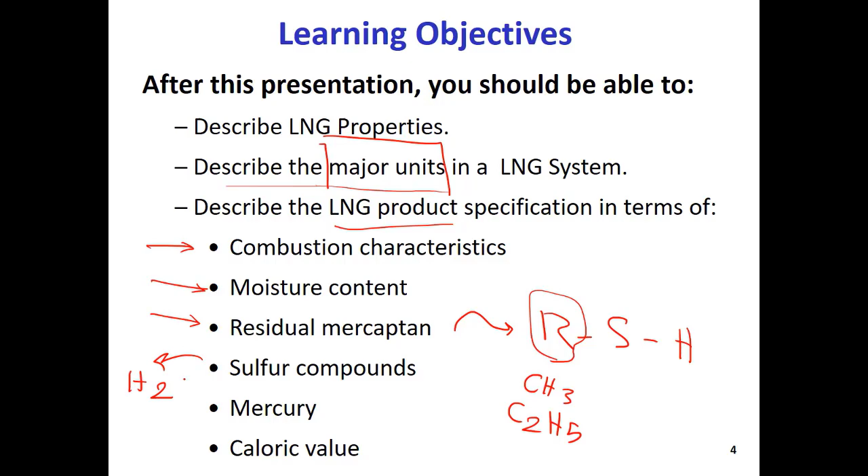S is sulfur, H is hydrogen, R is any molecule that has carbon and hydrogen, like CH3, or C2H5—any hydrocarbon that contains carbon. Other sulfur compounds can include H2S, for example, mercury, and caloric value.

LNG—what is LNG and its properties? LNG is liquefied natural gas, the natural gas in liquid form. It's a mixture of hydrocarbons, mainly methane. The main component of LNG or natural gas is methane, CH4.

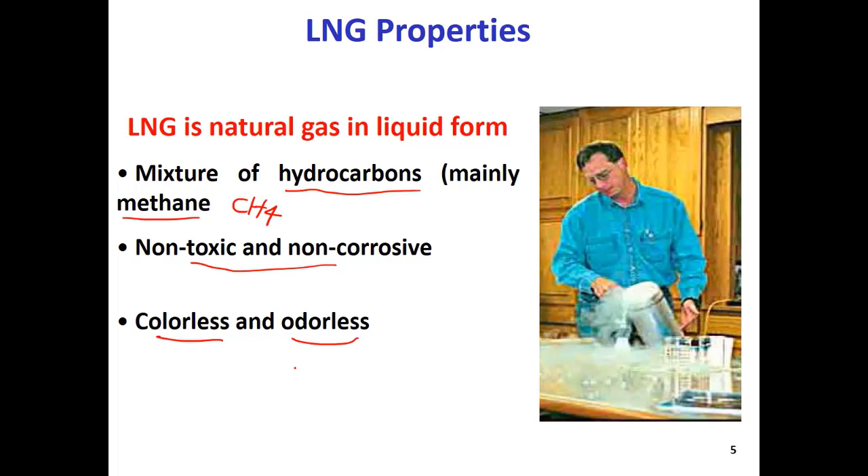It's a non-toxic and non-corrosive material, colorless and odorless—so it doesn't have any color and it doesn't have any smell. Once it is spread on land or water, it doesn't leave any residue; it will vaporize into the atmosphere.

Another property: it has a boiling point, as I remember, about minus 162 degrees Celsius. Below this temperature, it will be in liquid form. This is just one additional piece of information for you.

Above minus 107 degrees, it is lighter than air. So at atmospheric temperature, which is about 23 degrees C on average, the ambient temperature, it will be much lighter than air. Lighter means less density than air, so it means it can go up in the air very rapidly.

So it's very flammable—not explosive, but flammable. It can catch fire at very small volumes. Let's say if you have a container where between 5 to 15% of the volume is LNG, it can easily catch fire. It's not explosive unless it's ignited in a closed space—then it can be explosive. But it's not like TNT, which can explode even in solid form.

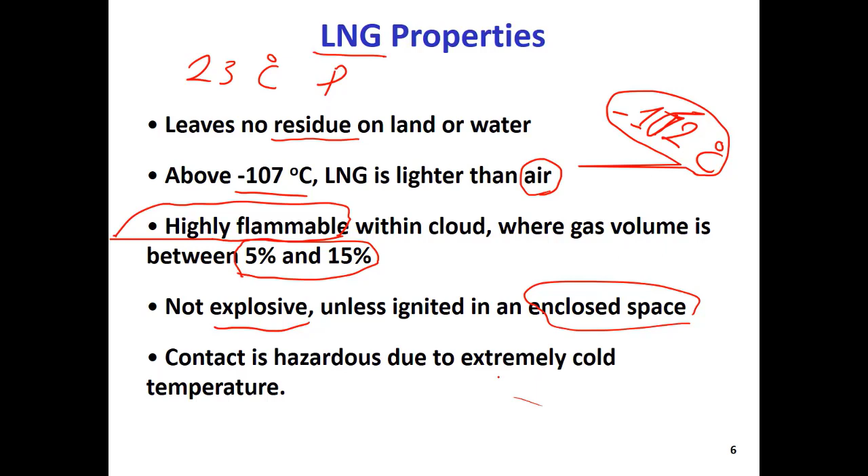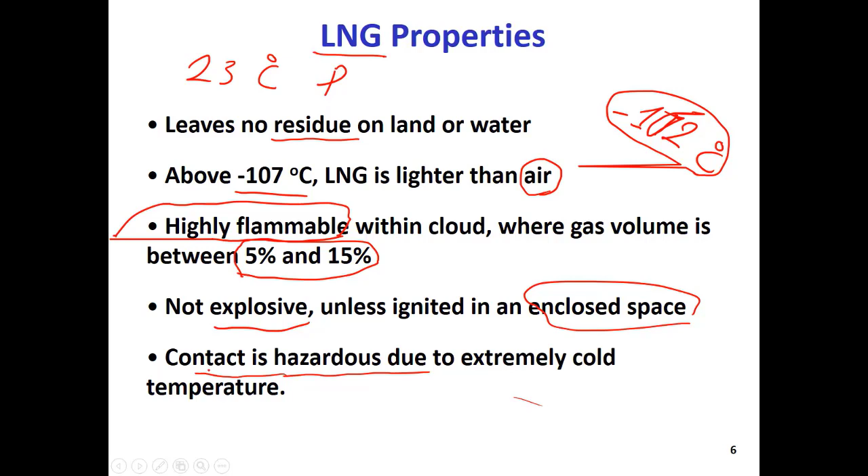LNG is maintained at a very low temperature. As I said, the boiling temperature is minus 162. It's kept at very low temperature, and that's why it's very dangerous if you touch it. If you have an LNG container, since it's at a very low temperature, it's very dangerous to contact with. So these two slides are the properties of LNG.

Now, why do we have to liquefy natural gas? Why do we have to create LNG? The first and main important reason is the lower volume. When you have, let's say, 1 kilogram of natural gas in the gas form, and you convert it to the liquid form, you decrease the volume by 600 times. So 1 kilogram of natural gas in the gas form needs a volume 600 times more than if the gas is in liquid form.

So that means if we liquefy it, we need much less volume, so we can transport and store it more easily. And then, let's say if we have a gas pipeline that is supplying gas for us, sometimes during winter in cold countries the heating demand is higher, so we need to add more gas to the pipeline. If we have LNG storage somewhere, we can merge it with this gas pipeline and add more gas to satisfy the demand.

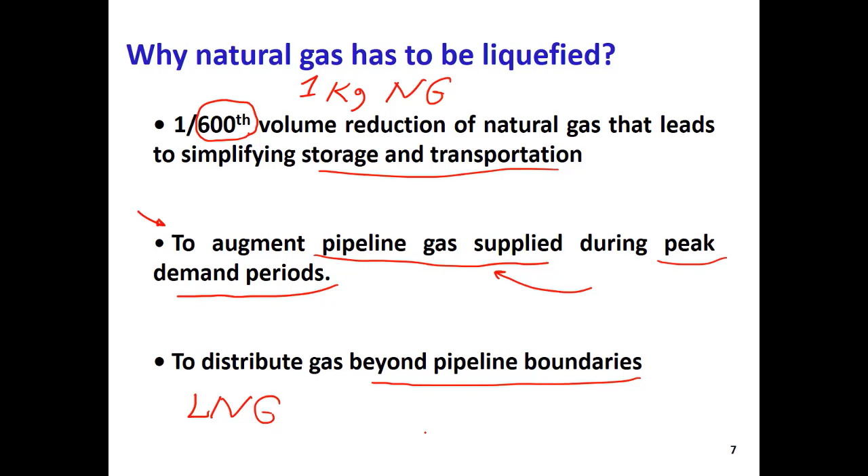Qatar is a country in the Middle East that has a lot of natural gas. We cannot export all this natural gas by pipeline to many other countries. Maybe it's possible to export to neighboring countries, but if you are going to export natural gas from Qatar to Europe or to Asian countries, we cannot do it with pipeline. We need too much infrastructure; it's not possible. This is impossible to do. So by having LNG, converting natural gas to liquid phase, we can send the gas anywhere we want, beyond the pipeline boundaries.

We have different petroleum products. Kerosene is a very heavy oil. Gasoline is light oil, light crude oil. Naphtha is even lighter than gasoline. There's also jet fuel and some other chemicals. We have LPG, liquid petroleum gas. So crude oil has different fractions, some of which can be liquefied easily, like those with between 3 to 4 carbons. We also have NGL, natural gas liquids, and LNG.

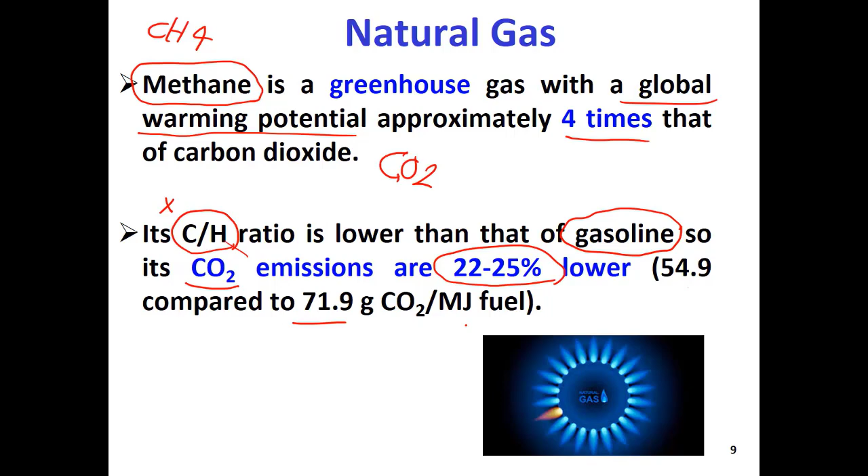That's why natural gas as a fuel is cleaner than gasoline, because when you burn it, it doesn't produce a lot of CO2 compared with gasoline. It's about 54 grams of CO2 per each megajoule of natural gas that is burned.

Liquid hydrocarbon like petroleum or gasoline is the gas we use in our car. Before I explain this, combustion of methane is different from liquid hydrocarbon combustion. The reason is that in liquid hydrocarbon like gasoline or petroleum, we have different carbon-hydrogen bonds; we can have double carbon bonds, different carbon-hydrogen or carbon-carbon bonds in gasoline.

But in natural gas, the majority of molecules is methane, which has only single carbon-hydrogen bonds, like 4 of them. This is different from liquid hydrocarbon, which can have different types of bonds. Even in liquid hydrocarbon we have double bonds and single bonds, but the majority is single bonds. In natural gas, we don't even have that single carbon bond situation - since there is no carbon-carbon bond involved.

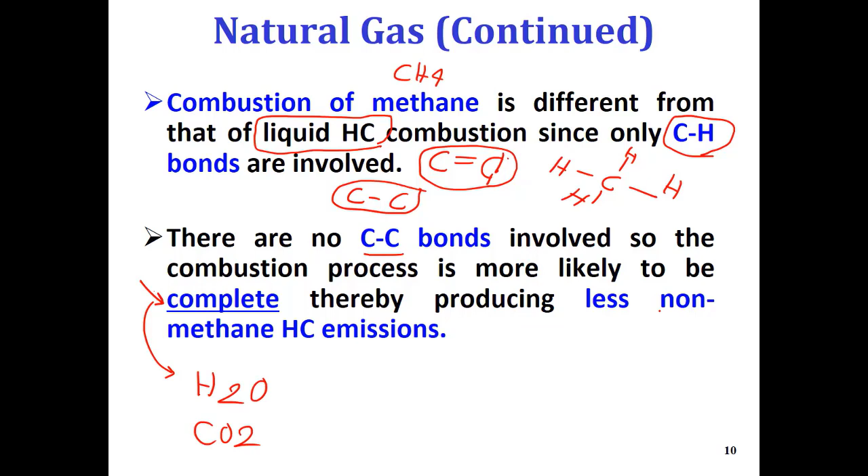Since we don't have carbon-carbon bonds, the combustion of natural gas is more likely to be complete. So we will have really complete combustion, and the combustion product is mainly water and carbon dioxide. It doesn't produce any non-methane hydrocarbon after combustion.

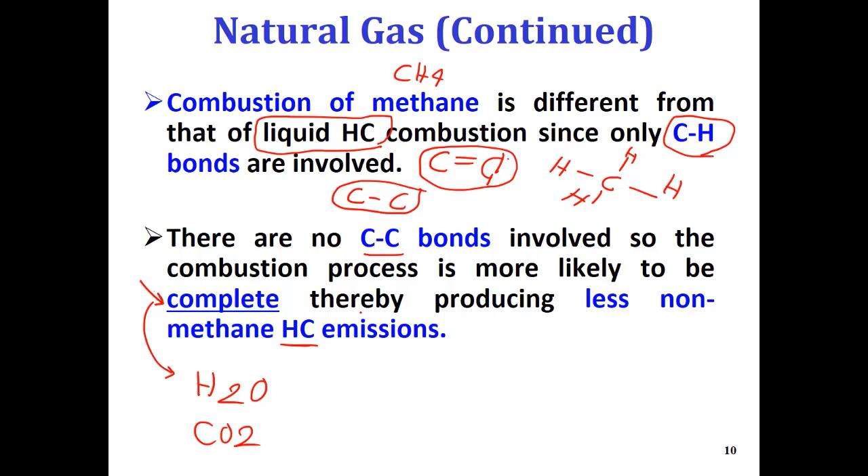Again, here we study some of the advantages - this is also a continuing advantage of natural gas. Particulate emissions are very low compared to diesel fuel. So when we burn natural gas, we don't produce any kind of smoke or coke formation. There is no smoke, so it's a very clean fuel.

The adiabatic flame temperature for natural gas is about 2240 Kelvin, which is less than that for gasoline flame, which is 2310 Kelvin. So the flame temperature is lower - this is another advantage. The equipment that burns this gas needs less thermal resistance, so it will be less costly for us.

If we can have a flame at lower temperature, this is advantageous - it's good for many applications in terms of safety and hazard considerations. The reason is that when natural gas is burned, it produces water, and this water content will keep the flame temperature lower, and it also gives us lower NOx molecules.

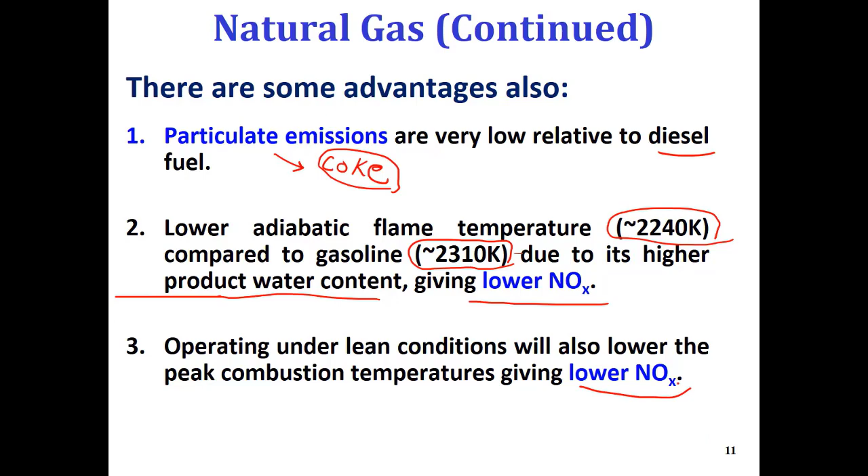We already talked about why we have to liquefy gas to produce LNG, but the natural gas coming out of the reservoir is not only methane. It has a lot of unwanted, undesired components that we have to separate. Depending on which area or country we are sending this LNG to, that country has specific requirements, so we have to treat our natural gas and convert it to LNG before shipping it to the receiving country.

So why do we need to treat it first? To obtain the specification requested, and to protect the equipment - many equipments are sensitive to corrosive components like steel and metals, so we have to protect them. Also for environmental reasons - these days environmental regulations are very strict, we have to follow them and meet them, otherwise we cannot be in the market.

Whoever is receiving your LNG will process it and send it to equipment - different equipment used for different reasons. The type of equipment or process using the LNG really depends on the LNG pre-treatment, which type of treatment has been done before. They have to check which type of treatment is needed, and the cost will vary. If you have dirty, sour, or sweet natural gas, they have different prices, so you have to see how much money you need to clean and treat that gas, then decide which option is more affordable.

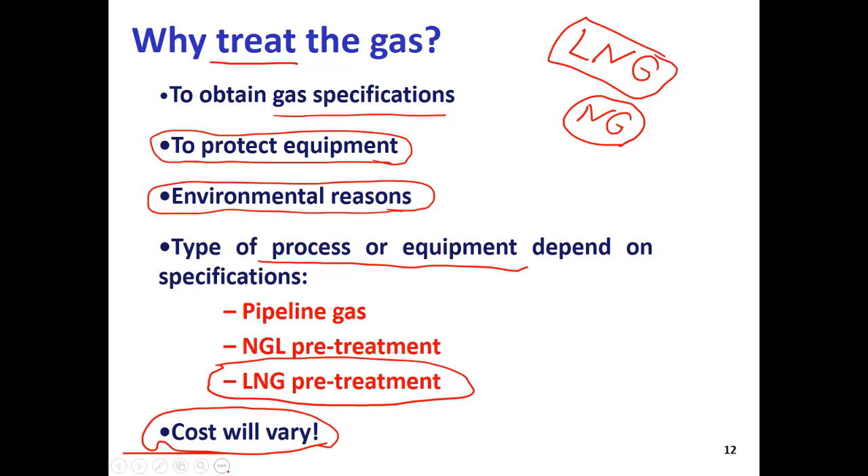So this is an overall diagram for LNG processing. Most of our gas fields are offshore, in the sea. We have gas stations that extract the gas from the sea, and we send it onshore, to the land. In the land, we have a sequence of equipment. First of all, we have equipment like a slug catcher.

That's because this natural gas coming from underground comes with sludge, mud, and water. So we have to separate the water, sludge, and some other impurities that can be easily separated based on their gravity or density. We can also have some condensate here, some heavy hydrocarbon molecules.

Then we have almost a raw natural gas free of solid or sludge. We will send it to several purification and treatment processes, which we'll talk about a little later. Then we liquefy it, we cool it down. When we liquefy the gas, we will also remove some heavy hydrocarbons, because LNG is mainly methane, so we try to remove as much as possible any molecules heavier than methane, like ethane, propane, butane, and so on.

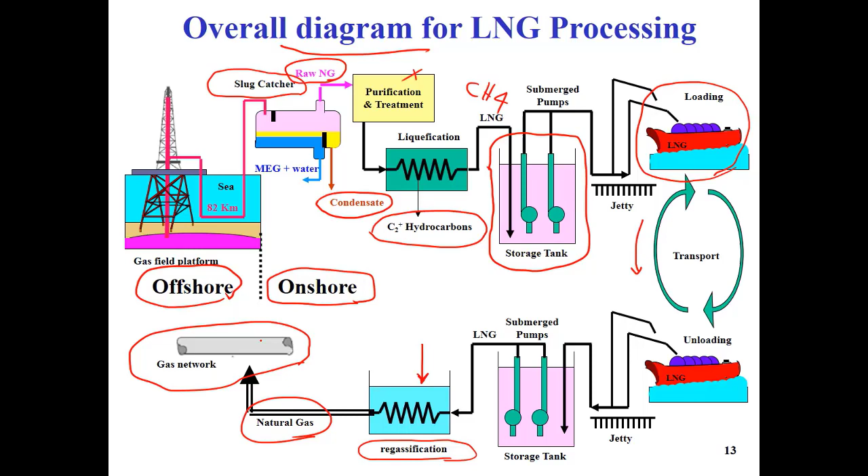So there are several steps in treating the natural gas, the LNG. I'm going to go briefly through this and explain them in this slide. So we have raw natural gas. We have to remove the mercury. Mercury is one of the impurities.

Then we have to remove acid gas. If you remember, in PO 2410 we had amine acid removal, where we had to remove CO2 and H2S, those are acid gas. Then we have dehydration, which we also talked about in PO 2410. So now you can see why we had to learn about that equipment.

So we have dehydration, where we remove water, and some mercaptans, which are sulfur-containing components. After that, we will have another step of mercury removal, and then we will send it to natural gas liquid recoveries, some heavy molecules, and chilling.

Then we will send it to the liquefaction process, to liquefy the natural gas at this part here. After that, we will remove helium. The natural gas usually has some helium components, we have to remove it, and most of the time it also contains nitrogen, which we have to remove. After that, we will have the LNG, which is proper for storage and shipping.

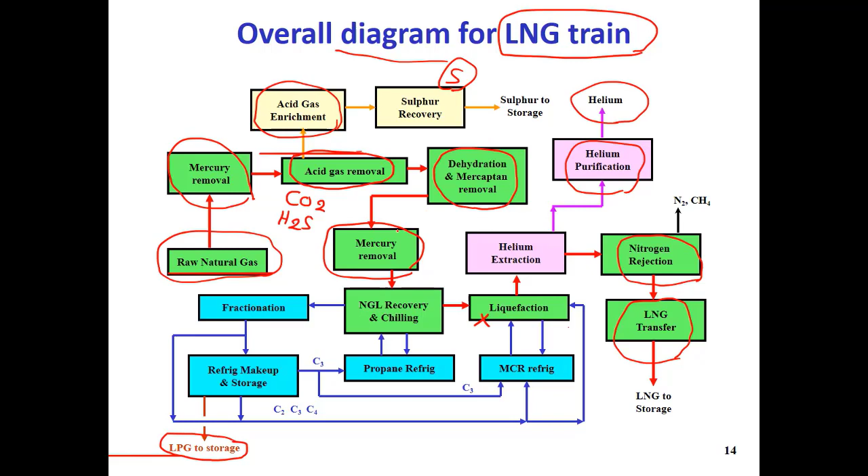The quality of LNG is defined based on different parameters. One of them is the caloric value - how much is the energy value of the LNG? How much is the heating value? So caloric value, or heating value, is one of the criteria to evaluate the quality of LNG. We also call it heating value or HHV.

And in some markets or countries, they also use gross calorific value, GCV. So what is this? It is the energy content per volume of natural gas in the gas phase - energy content per volume of natural gas, let's say megajoule per cubic meter or megajoule per liter of natural gas at standard temperature and pressure when it is burned completely in dry air.

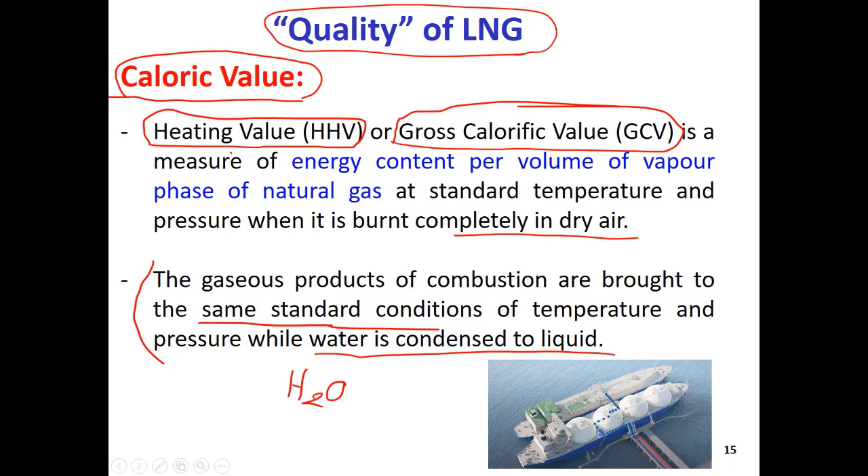But caloric value or heating value is a good parameter to evaluate the quality of the gas, but it's not a sufficient value. It's not enough, because two gases with the same heating value can be very different - we can have two different gases that have the same heating value. So heating value is not a unique identity for a gas; we need something more specific, more unique.

So whoever is receiving your gas, your LNG, will care about these two things: the combustion properties - because they usually burn that gas and use it in heating devices for energy, so the operation of that burner, the gas burner, is very important. So they will care about the combustion properties, which is usually described by the interchangeability parameter.

And also, the customer receiving your gas really cares about the level of impurities in your gas, because this is very important for safety, for the environment, and the performance of the chemical plant that is receiving your gas as a feedstock. So your customer takes care about these two things.

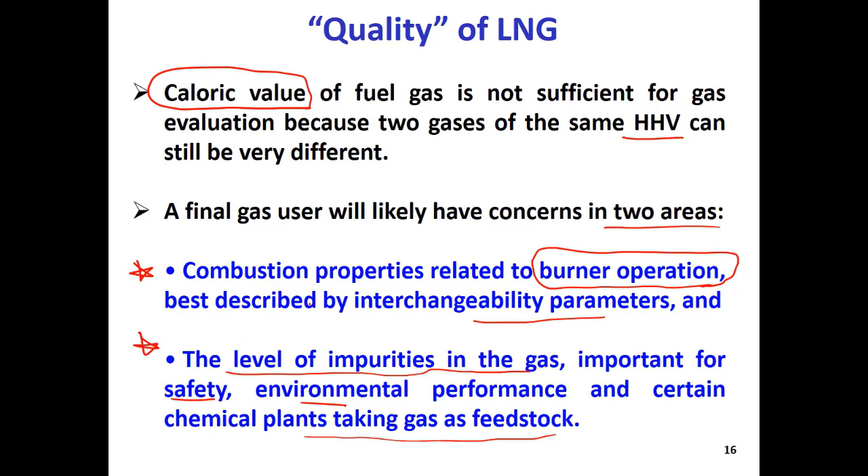Okay, heating value, HHV, although it is a good parameter to evaluate the quality of the gas, as I said, is not enough and is not really unique. So we need to use another parameter, another index or indicator. The Wobbe number, also called the Wobbe Index, is one of those unique parameters used to evaluate the combustion characteristics of natural gas. It's a very important parameter to evaluate the combustion performance of natural gas.

So it has more meaning than the heating value. Wobbe number or Wobbe index, we show it with WI, which is the heating value divided by the specific gravity to the power 0.5. This specific gravity makes it a more specific parameter for my gas. Why? Because two different gases might have the same heating value, but since they are different molecules, they don't necessarily have the same specific gravity. So this is why this parameter is more interesting.

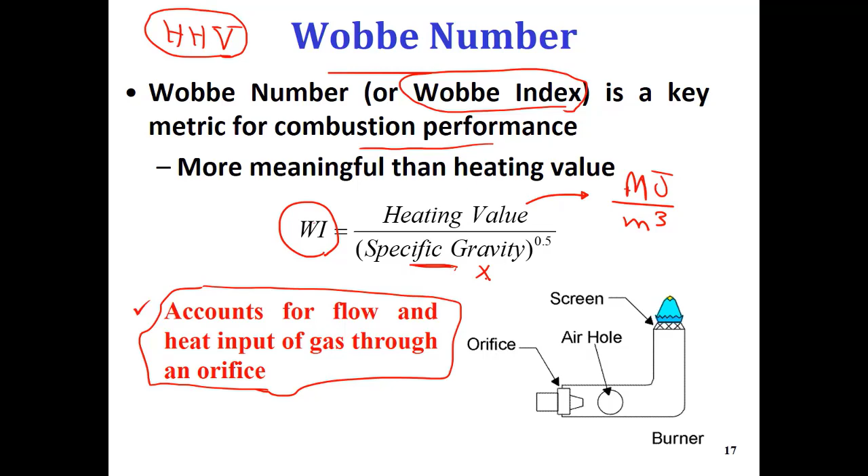Wobbe index, as in the previous slide, is energy divided by specific gravity. Heating value, if you remember, is the amount of heat per volume, let's say megajoule per cubic meter. The specific gravity is a dimensionless, unitless number. So the Wobbe index has the same unit as heating value, megajoule per cubic meter, or BTU per standard cubic foot, SCF.

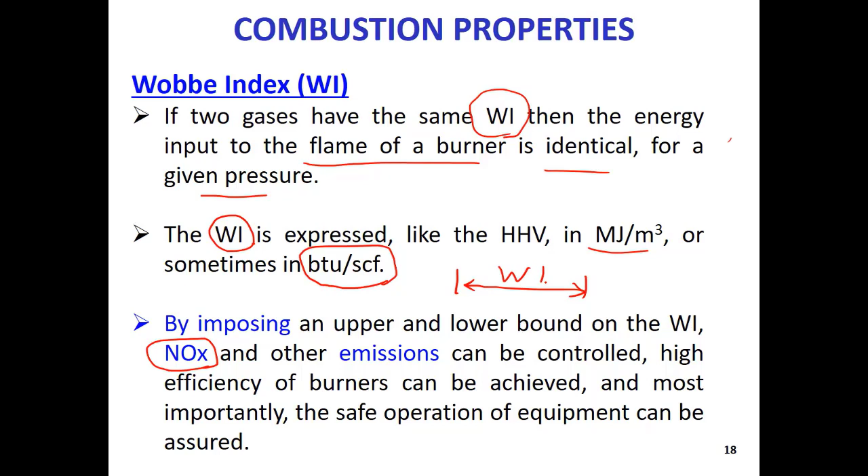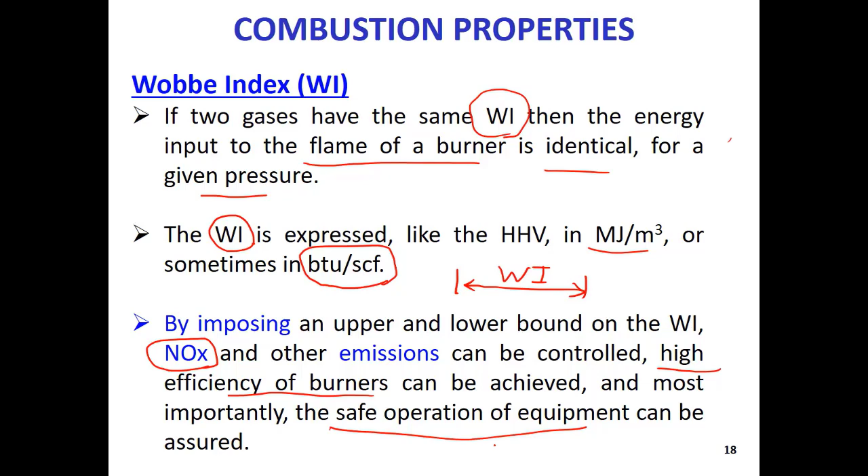The combustion properties also define the amount of pollutants like NOx or emissions that we produce by burning natural gas. If we put a lower and upper bound for the Wobbe index of the gas we are receiving, then we can control the amount of NOx and emissions, and we can also have a very high burner efficiency and a very safe operation of equipment. So having a limit for the Wobbe index is very important for controlling emissions, burner efficiency, and safe operation of the equipment.

Okay, so we talk about the interchangeability parameters. One of them is the Wobbe number, let's say megajoule per cubic meter, and another is the percentage of non-methane components in LNG. As I said, the majority of LNG is methane, but if we mix this methane with some non-methane components like nitrogen, then we can change the combustion properties of my LNG or natural gas.

So we have graphs that show the acceptable operating condition for our natural gas. This is what most countries follow. The acceptable range for the natural gas is this area. Below it is an emergency situation, above it is an emergency situation. So if my Wobbe number is between this lower limit and this upper limit, and the percentage of non-methane components is in this range, then I will have acceptable combustion.

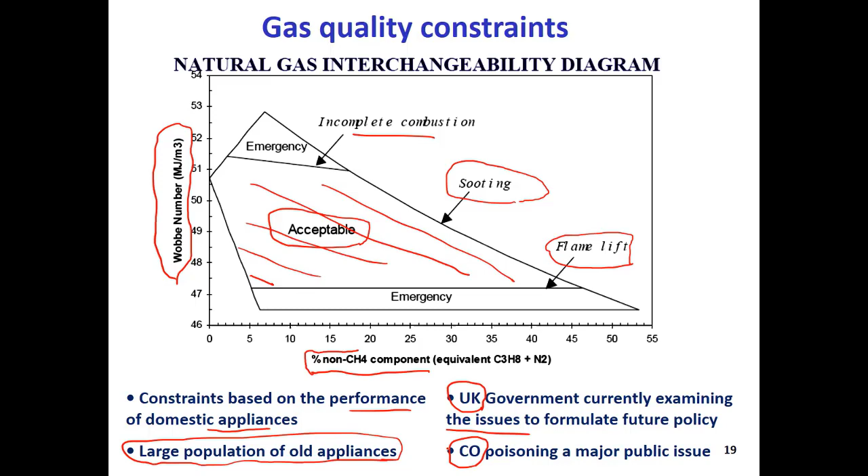Okay, so how we can stay in this area that I already talked about. So for UK, the LNG that, let's say, the UK is receiving from Qatar, it will be in this area, this blue line. It has to bring this blue line to somewhere here, the acceptable range. Here you can see that if we add nitrogen, let's say 2% or 4% nitrogen to our LNG, then our operation will be in the acceptable range, like this one here.

Okay, so you see that LNG, a pure LNG, has a very high Wobbe number and Wobbe Index, very high heating value. Once we add a little bit of nitrogen, we can make it a bit lean. We can reduce its heating value and we can keep it in the acceptable operating range. So most of the LNG that is received by the UK, based on the UK market, is very rich, richer than what they need. So they have to mix it with some other components like inert gas, nitrogen, to bring it to the acceptable range. So ballasting with nitrogen brings it to the required specification.

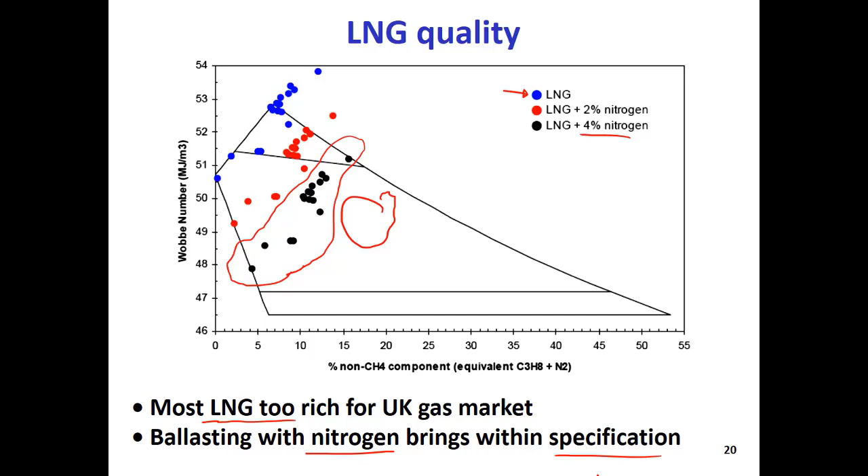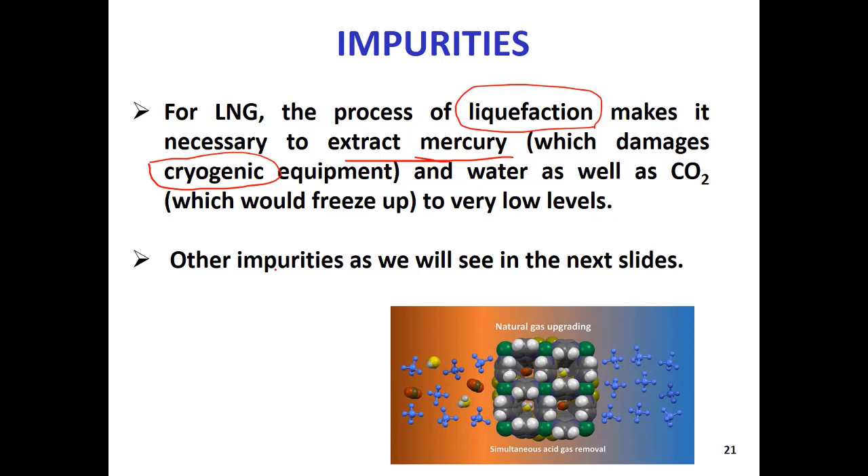Okay, impurities. There are various types of impurities that I will show you in the next slide. So before we send the natural gas to the liquefaction step, because we cool it down, we need to extract the impurities. The main impurity is mercury, that will really damage the cryogenic equipment. Cryogenic equipment is mainly for the cooling process, refrigeration process. Mercury will really damage them. Water and CO2 are also impurities in natural gas. Water and CO2 will freeze, and so we have to remove them, right? There are also other impurities that you can see in this slide.

So carbon dioxide, H2S, mercaptans, as I said, we show them as RSH; they are hydrocarbon molecules that contain sulfur components. R can be any hydrocarbon. Carbonyl sulfide, COS, is also an impurity. Carbon disulfide, CS2, is also an impurity. Water, and finally mercury. So how much of these impurities is allowed in natural gas or LNG? What is the maximum amount of these things in our natural gas? This will be defined by our customer.

The customer uses this natural gas in some downstream equipment, and also during treating the natural gas, before I send it to the liquefaction refrigeration step, I have to remove mercury. So the degree of removal of these components, how to remove them, and the sequence to remove them really depends on the downstream equipment. We have to follow these limits. The amount of CO2 has to be below 100 ppm, volumetric ppm. The reason is that it can freeze and cause equipment plugging. H2S should be below 4 ppm. This is the gas sale specification. When we are going to sell it, we need this much H2S.

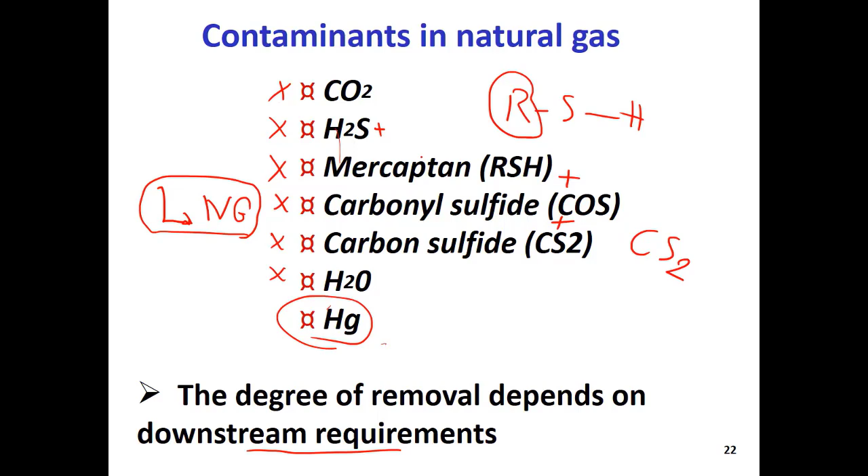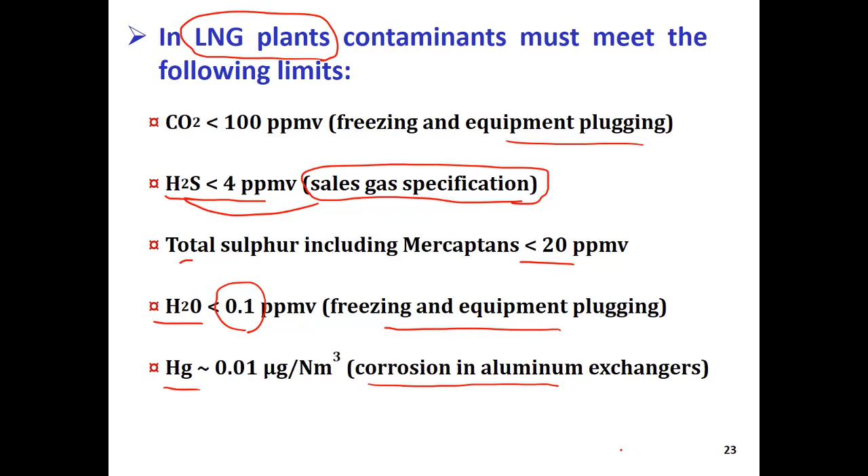Total sulfur, including mercaptans. Total sulfur means COS, CS2 plus mercaptans, all these three, and also H2S here. We have 4 sources of sulfur. The total amount of sulfur in the natural gas has to be below 20 ppm, volumetric ppm, and water, since it freezes and can create plugging, has to be very low, 0.1, and mercury below 0.01 microgram per normal cubic meter. The reason is that it can create corrosion, especially in aluminium exchangers. So we are very strict about mercury, and we have to really remove it carefully.

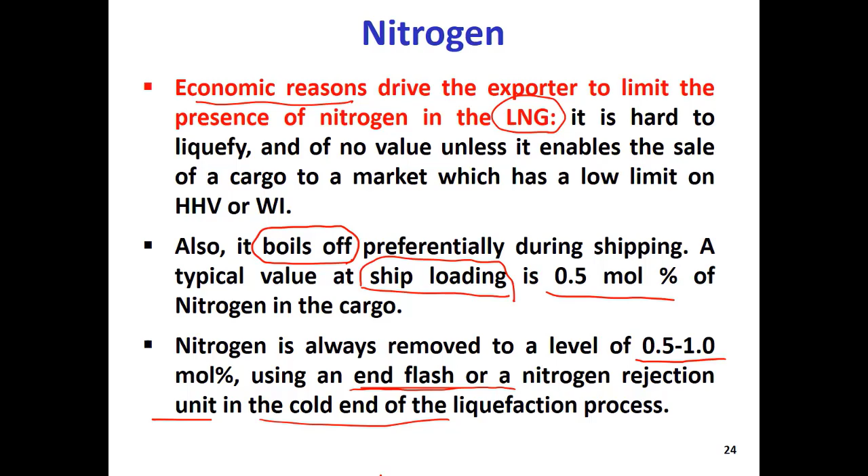And we remove the nitrogen at the end, in the end flash or a nitrogen rejection unit, in the cold end of the liquefaction process. So at the end of the liquefaction process, we will have an end flash for nitrogen rejection.

Oxygen: usually we don't have a big amount of oxygen in the natural gas, except in some cases it is introduced artificially. Let's say when the natural gas coming from the reservoir contains water, we might have some dissolved oxygen in that water, and that oxygen might be transferred to the natural gas. Except that, in general, natural gas doesn't contain oxygen naturally.

And the problem with oxygen is that even a small amount of oxygen in an LNG export plant can cause corrosion. Especially when we are going to treat our natural gas, if the natural gas has some oxygen in the amine treating unit. The amine treating unit is a unit where we remove acid gases like CO2 and H2S. This oxygen in that unit can cause corrosion, so we have to be very careful about that.

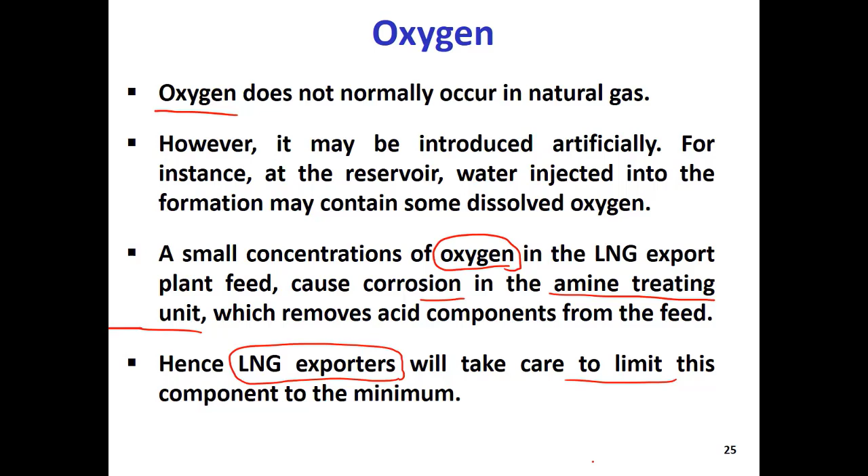So the LNG exporters will be really careful to put a limit on this. Whoever is receiving or exporting the LNG has to keep the amount of oxygen to a minimum. The reason is that it can create corrosion in the amine treating process.

Sulfur also, as I said, can be in the form of H2S, hydrogen sulfide, COS, carbonyl sulfide, mercaptans, and also CS2, and generally we call it total sulfur. Sulfur is also very limited in the sale contracts, and the reason is environmental issues.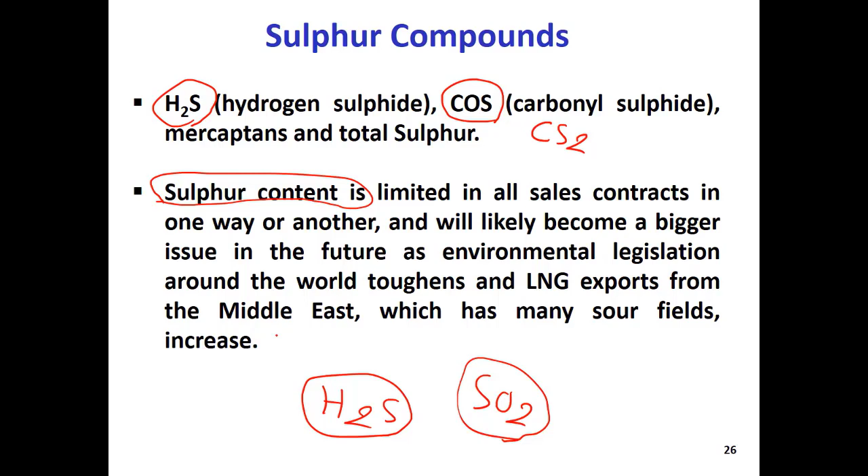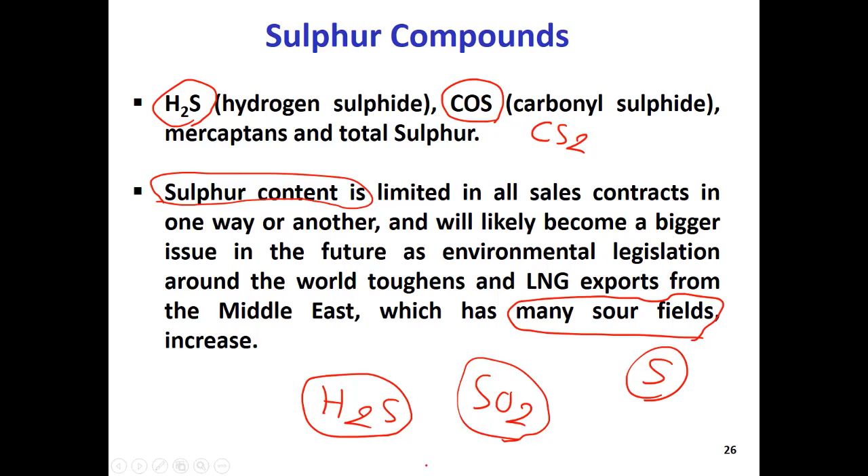In the future, environmental legislation is becoming really stricter, because H2S or sulfur compounds like SO2, sulfur-containing molecules, are very dangerous to the environment. So future environmental legislation is very strict about the amount of sulfur in LNG, especially in the Middle East, where we have many sour fields. Sour field means our natural gas contains a big amount of H2S, so for us it will be a bit more challenging to control the amount of sulfur in LNG.

Then, some more details about the amount of sulfur in natural gas. H2S, or hydrogen sulfide, is one of the impurities in natural gas and LNG. It's highly corrosive, especially in the presence of water. If you have water content, H2S can react with water, and these two together can be very corrosive, and this is very problematic.

Let's say when your customer country receives your LNG, it has to regasify the LNG and send it to the pipeline. And most pipelines have a high amount of water content. So if your LNG contains H2S, it can react with that water content in the pipeline, and it can make a lot of corrosion problems.

So the typical limit for H2S is between 5 to 7 milligrams per cubic meter. But it depends again on the country. Let's say Japan, for example, is moving to a much tighter specification, and they really need a lower amount of H2S in the LNG they are receiving from the sellers, from the exporters.

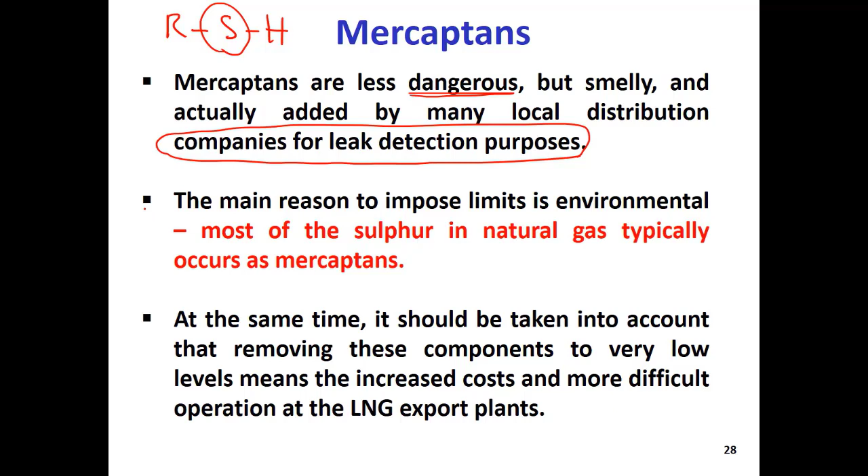Mercaptans, as I said, are RSH molecules that contain sulfur. They are less dangerous, but they are smelly. And that's why they are less dangerous - I mean, there is less sensitivity regarding mercaptans. Since they are smelly, they are used usually for leakage detection. In many distribution companies, they use them for leakage detection, and since they are not that dangerous, it's okay to use them for that. If there is any limitation for mercaptans, it's really because of environmental issues - they contain sulfur, which is dangerous for the environment. So most of the sulfur content in natural gas will be in the form of mercaptans.

One additional piece of information: yes, we know that we always want a very limited amount of these impurities in our natural gas, in our LNG, but we have to take into consideration that changing any of this limitation, removing any of these impurities to the lowest possible amount, means more separation, more expenses, more work. So those are the things that the exporters will always take into account.

EASEE is European Association for Streamlining of Energy Exchange. The union is an association that controls this market. So they have proposed to put a limit of total sulfur in the gas imported from any country to EU, European Union, to be 28.42 milligram per cubic meter. So the total amount of sulfur in the natural gas in the LNG imported to EU should not exceed 28.42 milligram per cubic meter.

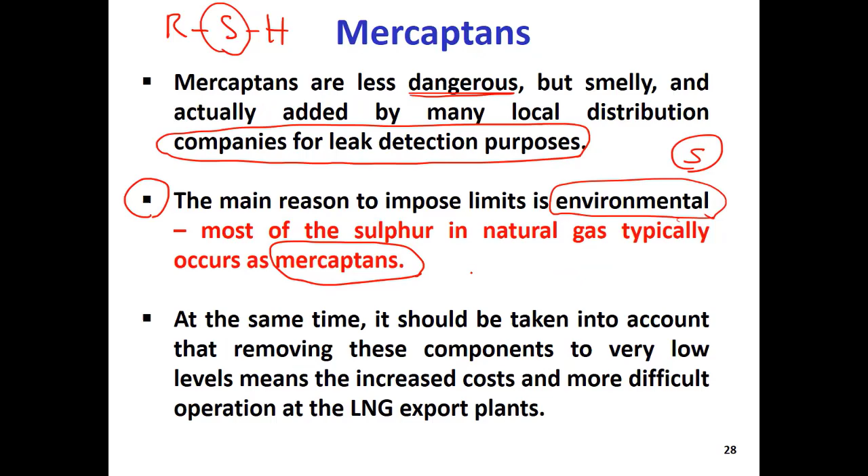However, they put some limitation for the amount of mercaptan itself, which is less than 5.69. So here, they proposed to even bring it down, to bring it to 4.74, but the current limit for mercaptan is 5.69 milligram per cubic meter. As I said, they are proposing to even bring it lower. That is still very difficult for some exporters to reach this level, because removing these components, impurities, means more cost, less benefit.

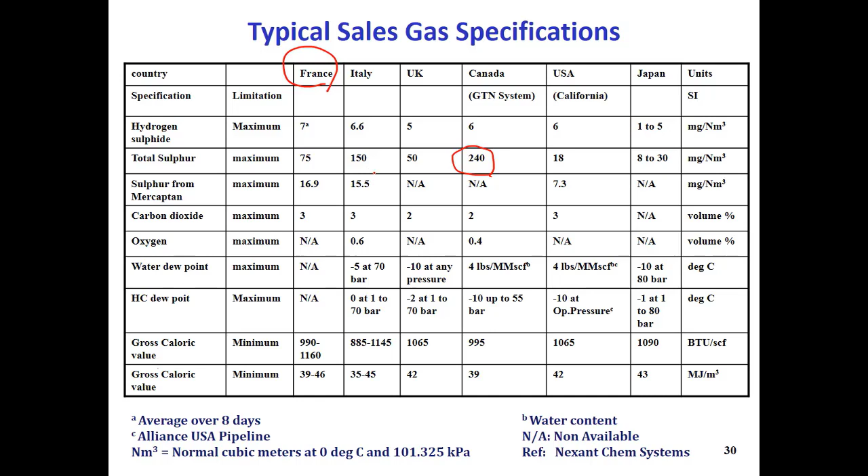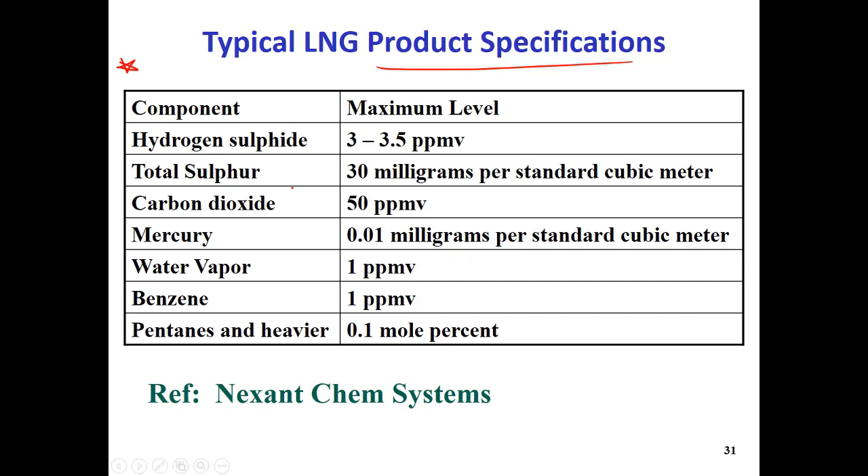Quality adjustment of LNG - you saw one example of UK, where the LNG they receive is too rich, very pure, so they mix it with nitrogen. This means the adjustment of the quality of LNG based on the need of that customer.

So how can we adjust the quality? By enriching LNG by adding LPG - liquid petroleum gas - to adjust. This is one of the ways.

You had that table showing what LPG is, the major molecules. Another way is blending LNG with natural gas, because LNG and natural gas have different components - when we condense natural gas, we remove some components. So natural gas as it arrives in the pipeline can be different from LNG. Or we might have LNG received from different countries with different compositions. We can blend these LNGs to get the LNG properties we need.

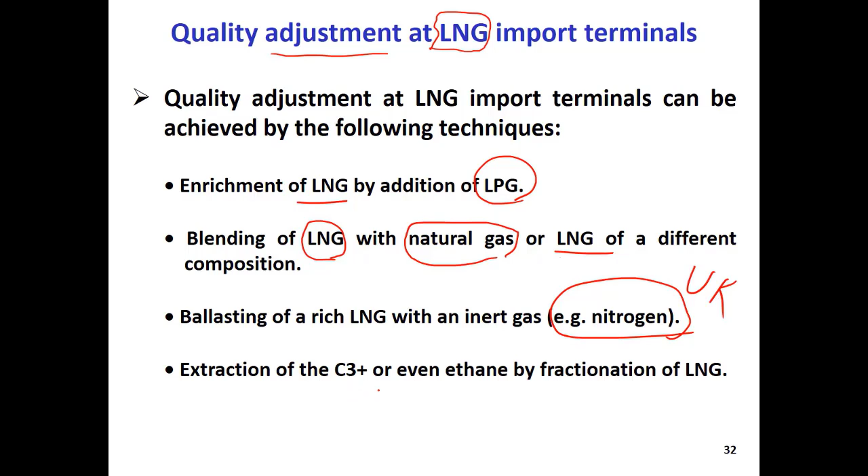Or mixing with some inert gas like nitrogen - this is what's happening in the UK. Or extracting C3 plus or even ethane C2 fraction from LNG by fractionation, because LNG contains these molecules - it's not only C1, not only methane, it can have these components as well. So that means we can remove these molecules, C3 plus or even ethane C2, to adjust the quality of LNG based on what we need.

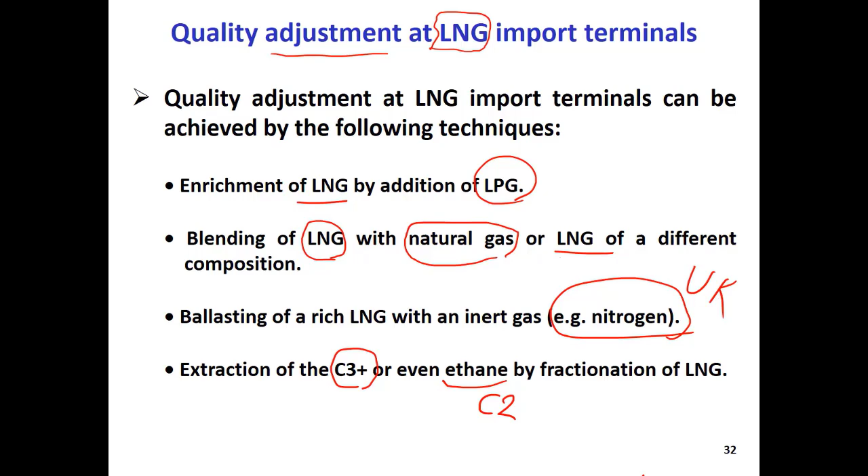Okay, here we have a summary - we are almost done with this unit. Natural gas is an important step as a summary. Natural gas is a very clean fuel with less impact on the environment compared to other fossil fuels like gasoline. It's a clean fuel.

Liquefaction is required for storage first of all, transportation, and also to respond to pipeline gas supply during peak demand. So during peak demand, we can adjust our demand - we can respond to the demand by using LNG and injecting it into the pipeline.

So purification and quality adjustment is a very important step. Why? Because we need to have the gas specification based on the need of our customer, protect the equipment from corrosion and some other phenomena, and also for environmental reasons.

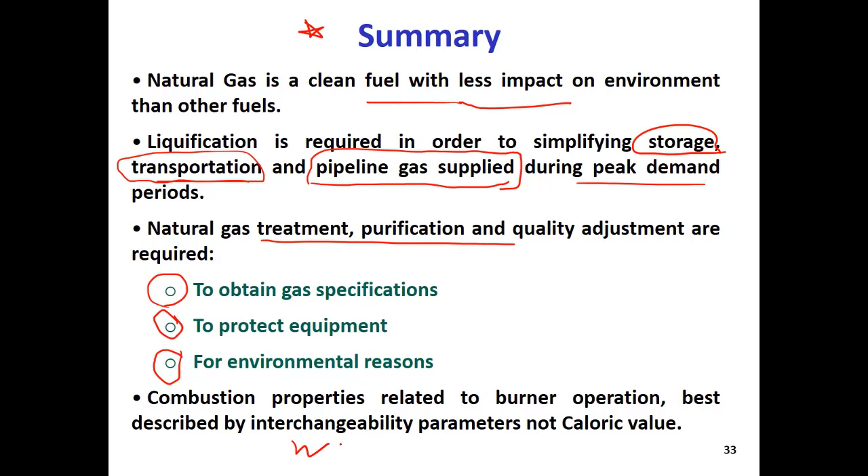Okay, and how can we adjust it? We can play with the Wobbe Number, Wobbe Index, and also interchangeability parameters - let's say mixing the natural gas with some nitrogen, inert gas, LPG, and so on.

Here, some conversion - there is another table we can use to convert HHV to Wobbe number, heating value to Wobbe index, based on the density of the gas and different factors. It's just a conversion factor from HHV to Wobbe Index or vice versa.

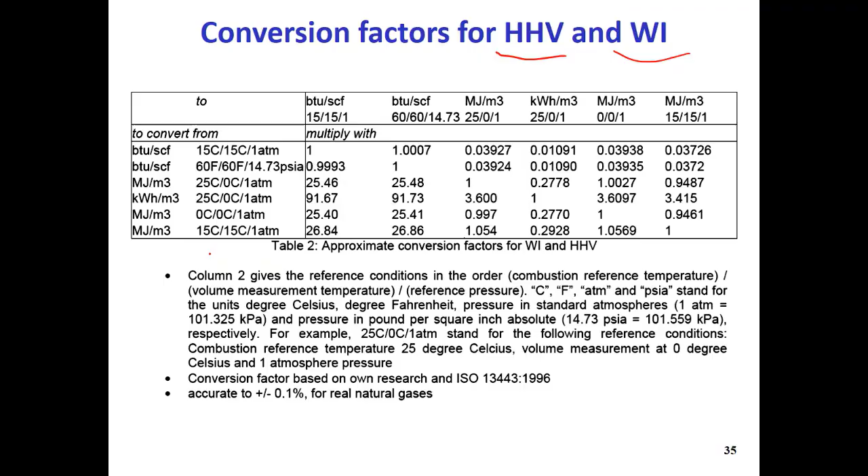Also, water content in natural gas - there are some tables here. For now you don't need to know these three tables, you don't need to memorize them. But this table is important - you might have some questions from this table, from these numbers here.

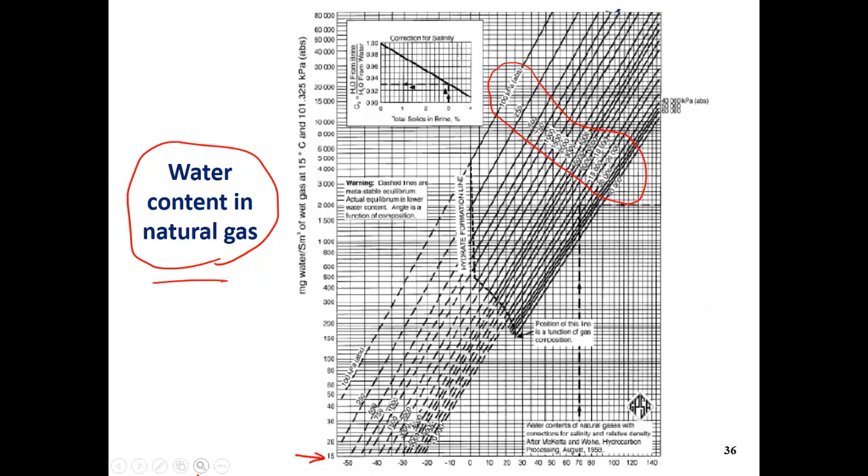Water content based on the temperature and also operating pressure - based on the operating pressure and temperature, we can calculate the water content of natural gas. So this curve is only used to find that parameter.

And finally, that's all for this unit. Hope you enjoy it, and I'm going to upload unit 2 and other units as well.